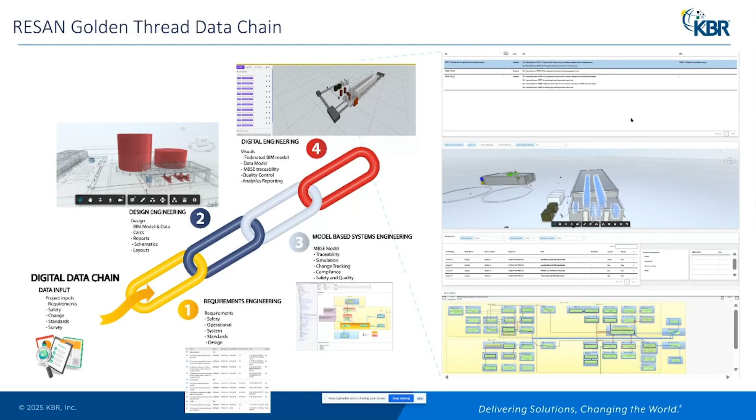So the use cases for such a tool. We've got a number of different use cases here. The most obvious one is requirements impact analysis. So if somebody wants to change a requirement, we can show all the things that requirement is traced through to. And then we can look from the bottom up as well. If somebody wants to make a change during construction phase or in through life support, an asset needs to be replaced, well, we can show you everything that's connected to that asset as well.

Safety case support: the tooling is there to show which assets are involved relative to which hazards, what safety requirements are traced to what, and what's involved in mitigating various safety issues. Part of what we need to do in order to make this useful is capture a large amount of information about key design parameters related to each of the assets. And so that naturally lends itself to initializing the effort to capture the technical specifications for each of the assets for procurement. It also allows us to seed asset management information systems. And by virtue of the fact that we've got all the information now in one place, we can do other things like requirements dashboarding and various traceability views.

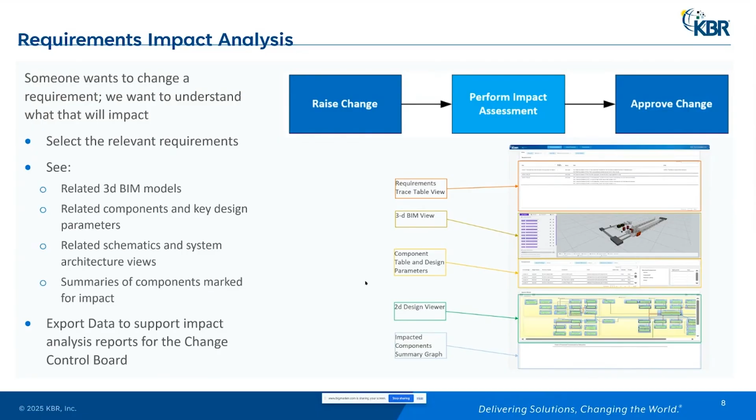And then finally, we've also got a little summary graph, and we can set that up to do what we want with it. So design change is very much the same, except we're now essentially using it in reverse. So we'd start by picking out a particular component.

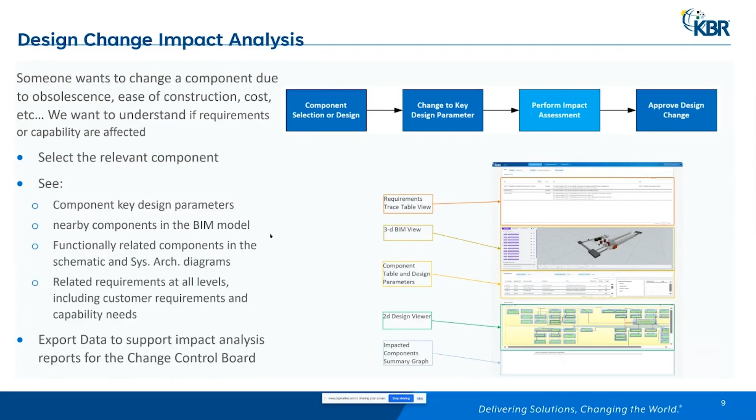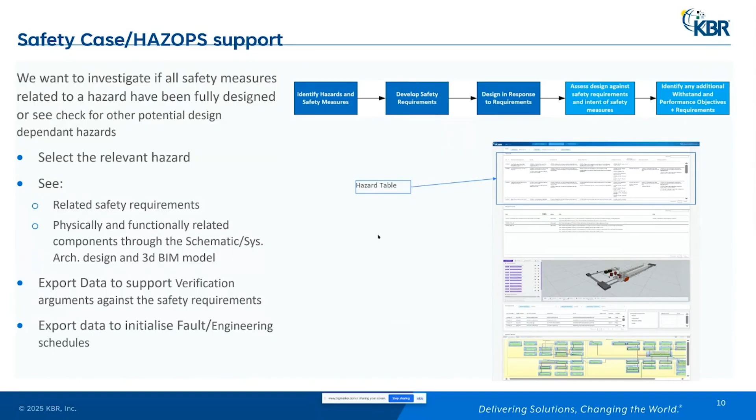Investigating how it fits into various functional chains through the system, and then we can explore the traceability from each of these elements back up to requirements and hazards and so on. You might be able to see that we've got a couple of little tabs up the top there. So we've got a different tab for each different sort of major use case. So we can move onto another tab, and then up the top, we've now got a hazard log view, which again is traceable, clickable, all of those things as well.

Okay, so having talked about some of those use cases, how have we actually put it together, and how does Capella fit into the picture? Capella is absolutely central to making this work, because what we have is all of the requirements information, all of the safety information, tracing through to the system model. So that's an important step. And then each of the different components in the system model trace out to the various elements that the designers have designed in their design/BIM tooling, and they've also captured all of the relevant key design parameter information as well.

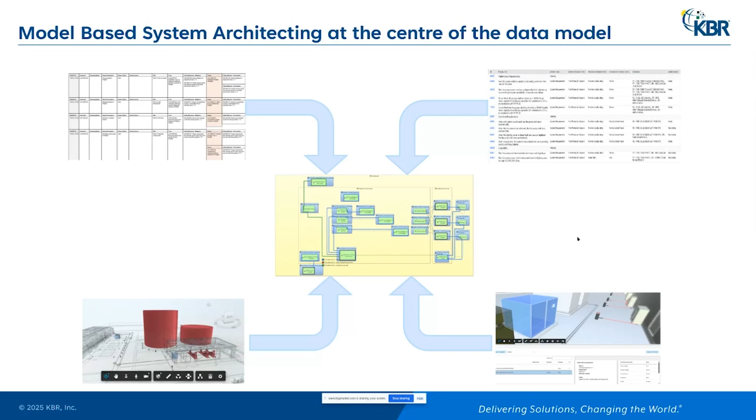The first choice I think we made here was to use Capella. So why did we use Capella, and why is it the right choice for this sort of application? I certainly have experience in using other tools like GENESYS in the past, but Capella is the right tool for this job, for a couple of different reasons. One, the functional chain modeling paradigm is absolutely critical to helping us understand how the various elements of the system all work together to satisfy a requirement. And that then helps us manage the traceability between the system model and the requirements model.

Next, there's a lot of data moving around behind the curtains to make all of this work, and the ability to use Python for Capella, which is such a powerful tool to help us with complex import and export and manipulation operations, is absolutely critical. It helps us make the tooling do what we need it to do. A number of other tools out there just simply don't have that.

The next is the REC and RPL paradigm. This is going to be very useful for us as we work through reference models and can start following the patterns that we've learned in pulling together the system model the first time, and then start replicating that again and again. Infrastructure models tend to have architectures that are quite repetitive because we're building the same thing again and again for each different building, for each different room, or along a train line, things get repeated. So REC and RPL, very, very useful.

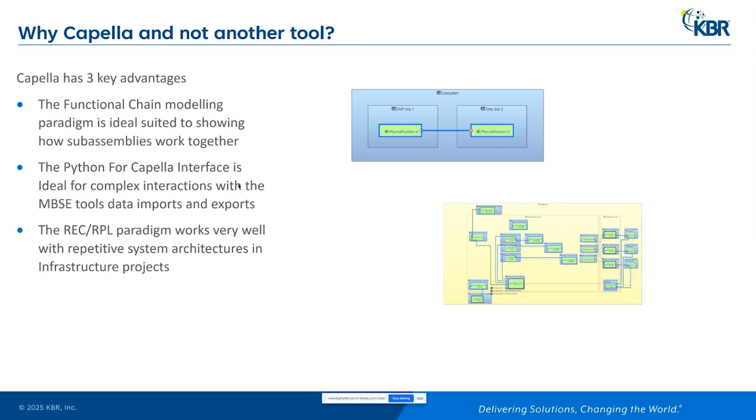So let's have a closer look at how we actually use Capella in RESAN. What I've got here is very simplified, and might be missing a few bits, but for the purposes of this presentation, I think this is good enough. What we have here is a simplified HVAC system, and we could have used any other basic infrastructure-like subsystem. We could have used CCTV, passenger information, electrical distribution. In fact, we have a little bit here. Because the pattern is more or less the same. There's an endpoint somewhere, a connection from that endpoint back to a local central element, and then a connection from that element somewhere outside the scope of the project.

So what we can see here is we've got three functional chains: one to supply cool air to a room, in the red we've got ventilate stale air from a space, and in the green, distribute power to the HVAC system itself. As we look at the functional chains, we've got air coming from the outside environment going to the cooling subassembly, which then goes to the air supply subassembly, which contains all of the assets you need: an air handling unit, ducting, and the air vent or air terminal, to supply air to the room. And then from the room, we've got the ventilation subassembly, venting air back out to the environment.

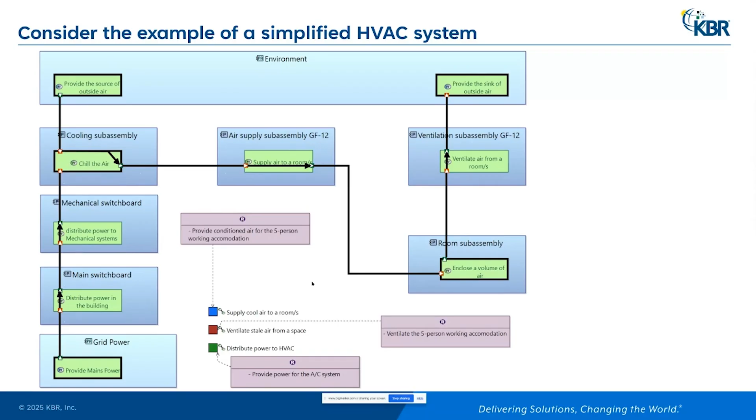So each of the subsystem level requirements, they trace to the functional chains, and further to that, we can also pick the top level requirements, and that then traces naturally to the compound functional chain, which includes each of these different subsystem level functional chains to show how the system as a whole, the infrastructure system as a whole, works together to achieve the top level requirement here of providing livable working accommodation for the entire system. So we can see we've got low level requirements, high level requirements, low level implementation, and high level implementation.

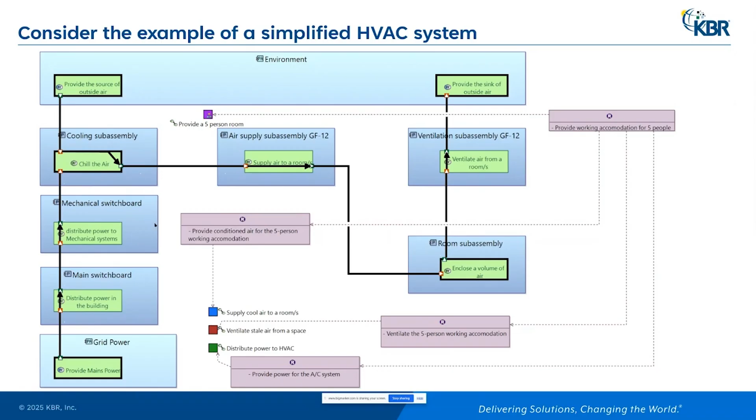This sort of shows how everything ties together. So we've got requirements coming in, and also safety data as well, and that traces through to the functional chains. And the functional chains, through the allocation of the functions, show us the relationship to the subassemblies, and then the subassemblies are the parents of the assets. So what that means, if we have a look here at the basic breakdown structure that we use, we've got the subsystem at the top level, followed by subassembly, followed by asset. And what that translates to is something a little bit like this.

So underneath the HVAC system, we have a number of subassemblies here. So here, the ventilation subassembly, which includes the air terminal, the ventilation duct, and the fan. And we've got the air supply subassembly here, which includes the air conditioning or cooling to air handling unit duct. We've got the air handling unit, we've got the air handling to the room duct, and then we've got the air terminal at the end there.

If there's any HVAC engineers on the line, I do apologise if I have designed something that is fundamentally wrong, but it's pretty useful as a little example.

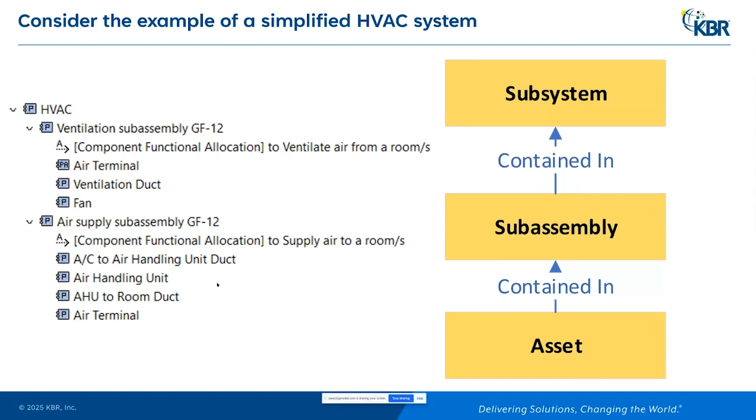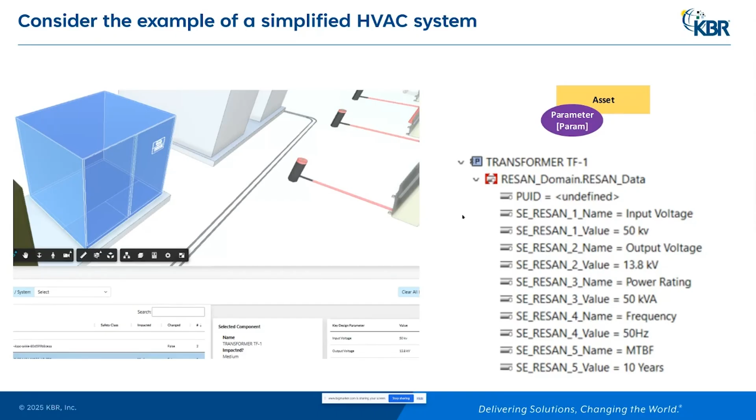So then, in addition to that, what we can capture in the model by using the property values management tool and defining a property set and all of the properties, we can start to capture those key design parameters related to each of the individual assets. So we can see here we've got input voltage, output voltage, power rating, and you can see that the way that we've done it is we've used generic names for the property value variables, and that means that we can capture different key design parameters for each of the different assets. That's quite important.

All right. So obviously there's a bunch of information there that we need the designers to capture for us. And so what they do, and they're used to doing this already, so that's kind of handy, is capturing metadata in their models. Every designer in infrastructure needs to capture metadata in their models for one reason or another. So all we did was say, can you capture a little bit more for us, please? Can you capture the key design values that you've calculated? You should already have that because you've done the design. Just please capture it in the model as well.

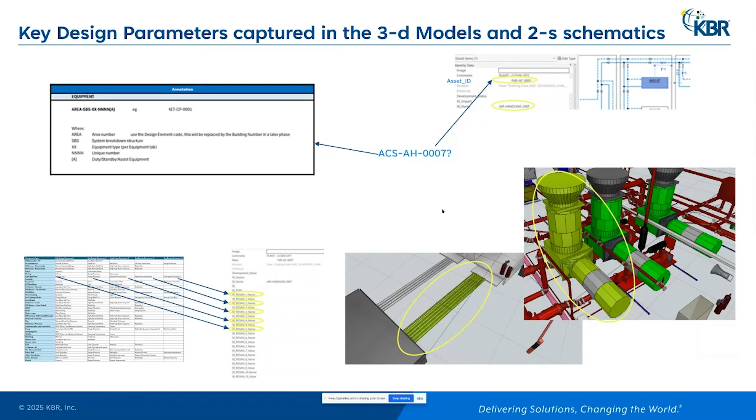So they're able to do that against each of the 3D elements, and they can also do that in the 2D schematics as well, which is great because it then helps us tie in the 2D schematics as well as the 3D modeling into the tool.

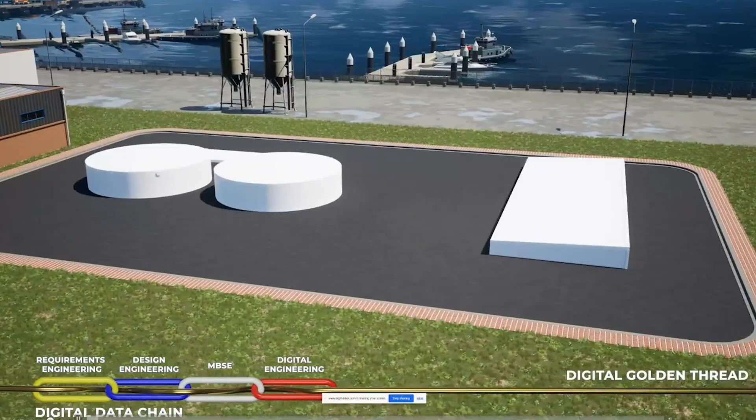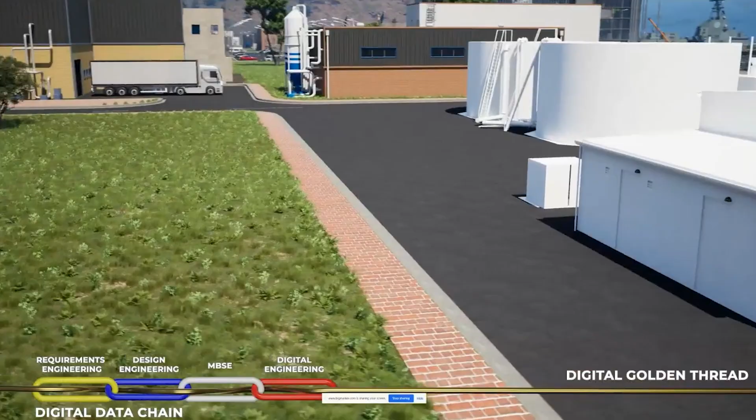So next, I have just a little bit of a video which I'll talk through, which introduces the example that we use. So here we've got a very much generic pump house with a substation next to it. So this is just a very small example. And we can see we've got a couple of transformers outside the substation there. We can see we've got some air conditioning units. We can also see some fans and some lights and some emergency lighting, and the brown elements are high voltage equipment cabinets as well. You can even see a little fire extinguisher there.

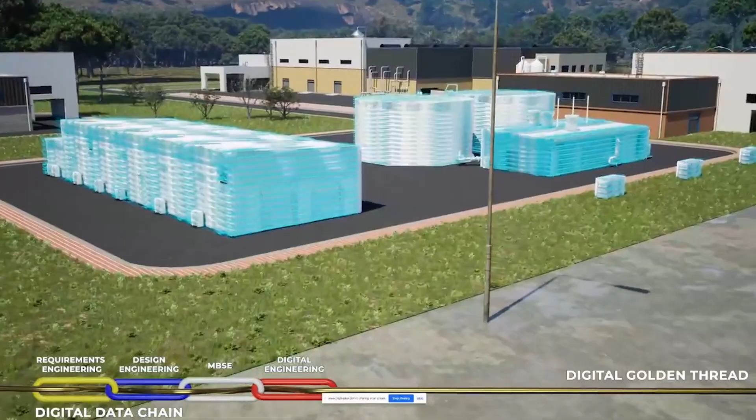So that's the little example that we use when we're showing off what RESAN can do without exposing our customers' information. And we'll see in a moment just a little bit of the interface.

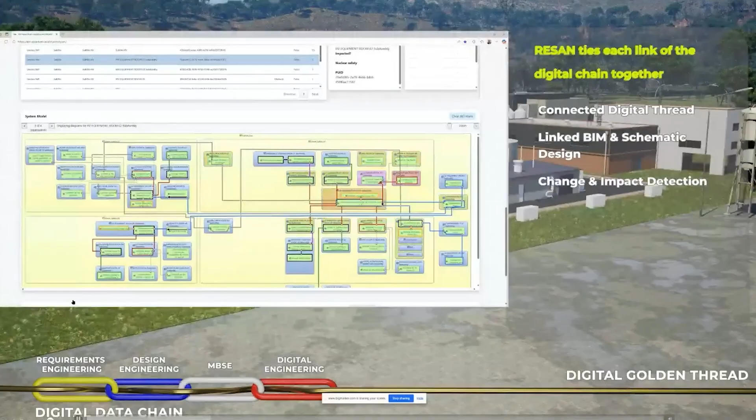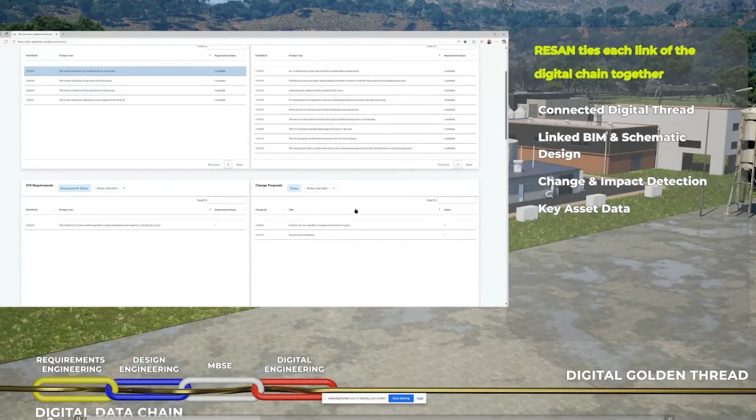So this is what it looks like. We can see the 3D model, we can see the components table, and we can see that we've got Capella models. We also use the property values management and the diagram styler to show additional information like potentially impacted components. Each time we click on a subassembly or an asset, we can bring up the component information.

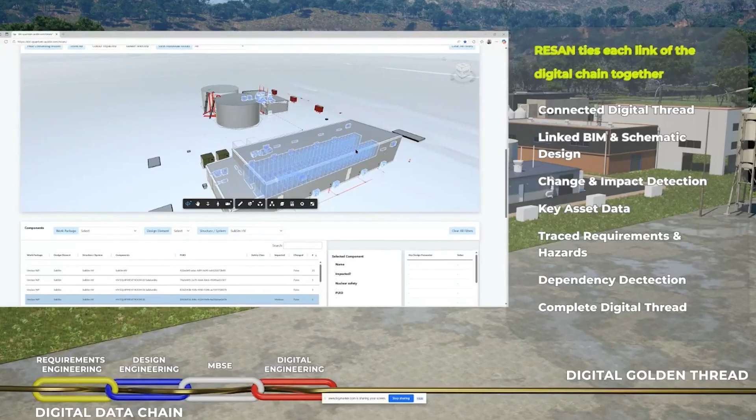And then this is our slightly snazzier requirements view of the world. We can click on a requirement, and we can see that everything else filters relative to that requirement. As we scroll down, we can see we've got a different set of things selected in the 3D model, all related to that top level requirement. We've got a different set of components selected as well. So that's just a very quick introduction to the tool.

Now we'll have a slightly longer look at the interface, which I will now drag across. Okay, so hopefully you can see that okay. So this is the same example.

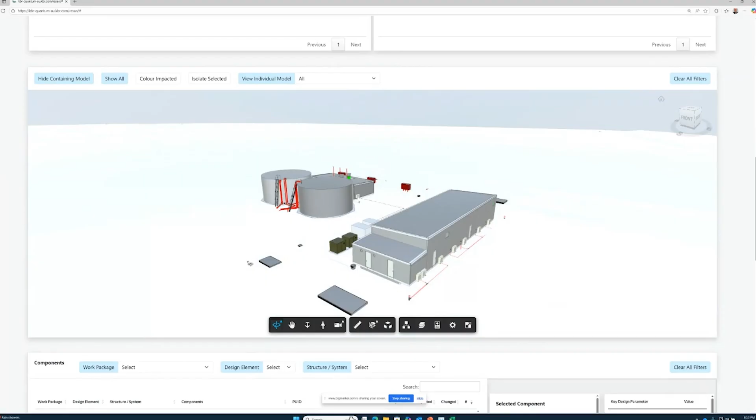You can see the interface here, and we can do all sorts of interesting things that are typical of this sort of tool. We can do sections if we wish - I won't do too much of this - so we get a slightly more cut down view of the world. We can color potentially impacted elements, so we get an instant visual representation of things like that.

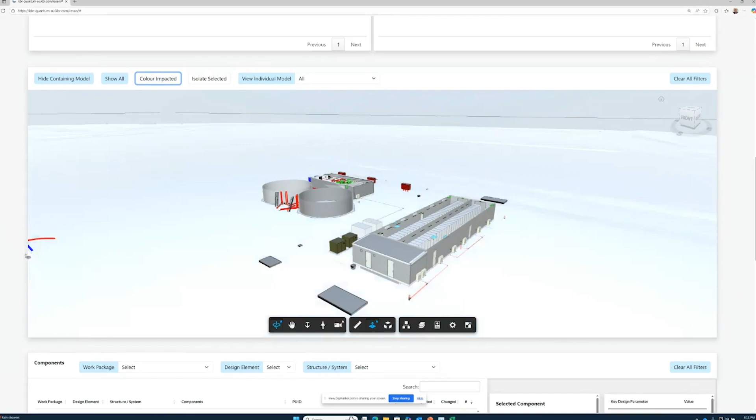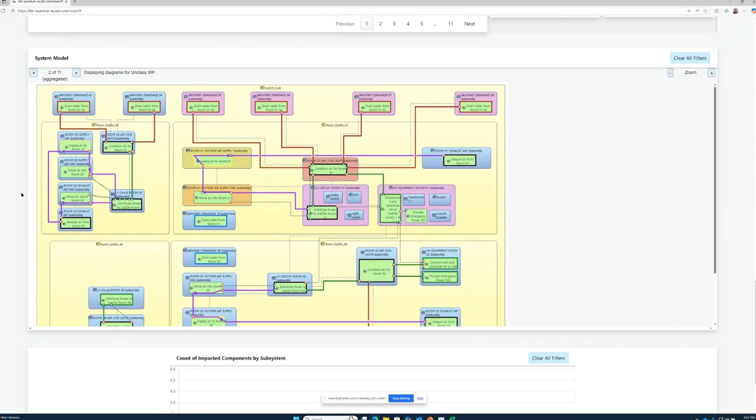And down here we can see we've got a set of different system diagrams. Now in our real project, we also have a set of schematics that exist in the same interface. So I'll just clear the filters here.

So this requirements quad is pretty neat. We've got high level requirements, low level requirements, safety requirements, and then change proposals. What we're able to do is just click on something, and we can see straight away everything else is filtered relative to it.

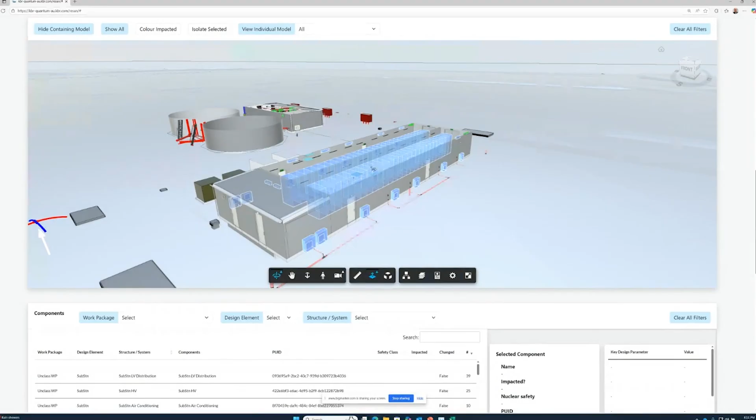So we can see here that we've got all of the high voltage equipment. We've also got the air conditioning identified, and the external units because I've selected the air conditioning units for the substation requirement. We can see just the subsystems, subassemblies and assets that are actually related to that particular requirement, and we can see a smaller set of system models here, 5 instead of 11, and it's all clickable.

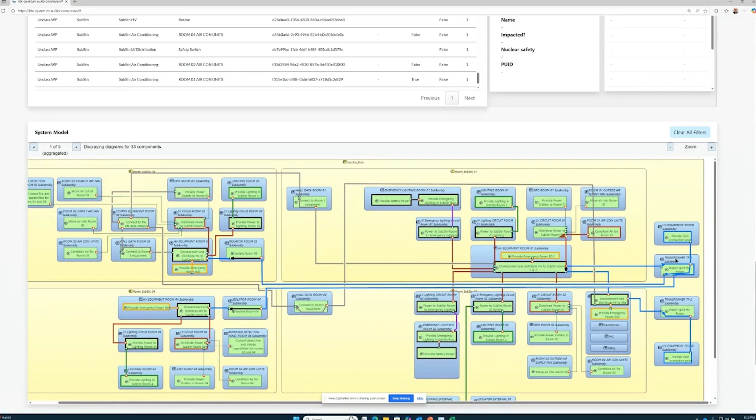And this is something else we've used out of Capella, which is really useful - we've used the XHTML export to be able to generate clickable images that we can then take advantage of. So I can now click on this transformer subassembly, and I've now got again a different set of diagrams.

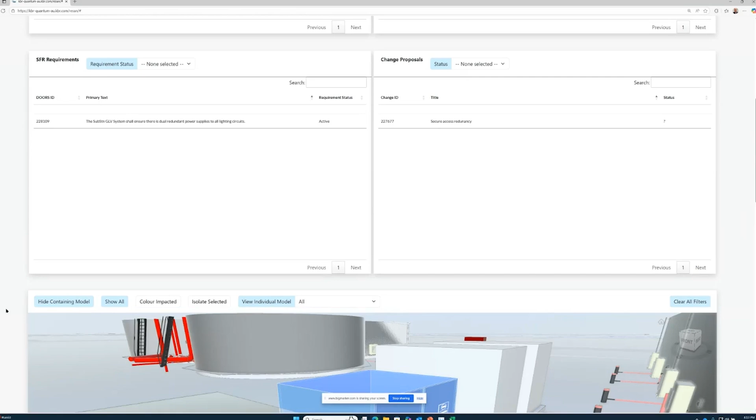And I can select the precise transformer here, and we can see all of its key design parameters here, just like the slide. We can see all of the requirements, so they've changed their filtering again relative to the transformer, and that's all driven through the traceability from the asset up to the subassembly through the functional chain, then into the requirements and on.

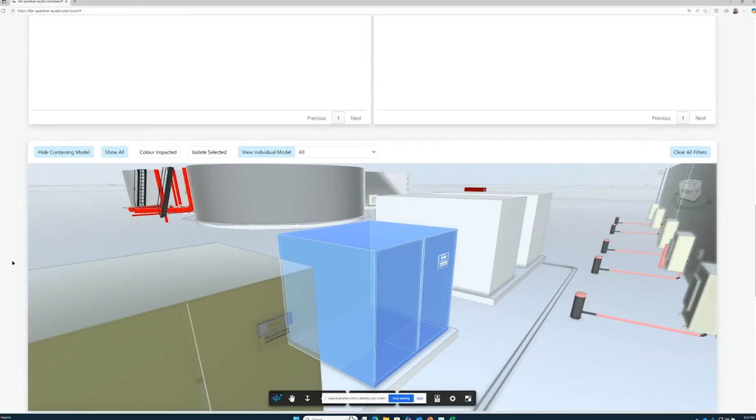And we have a look at the hazard analysis tab. We can also see the relevant entry in the hazard log that is related to that transformer. Okay, so there we go - that's, if you like, a very quick view of what we've been able to achieve.

Hopefully you can see how central Capella is to what we've done, because none of that joining up of the BIM models and the requirements and safety data is possible without the system model in the middle. So if I get that out of the way and come back to the slides, I've got one or two more slides to go - I think this might be the last one.

Lessons, sort of successes and opportunities. Broadly, I saw this in three categories: organizational/planning, technical, and value. So to begin with, organizational and planning.

You might think that when you're trying to introduce something new onto a project that by and large people would be standoffish, and this wasn't the case. I was pleasantly surprised that when you can show designers the power of the tool and what it can do for them, in terms of traceability, they were very keen to help contribute, which was a fantastic experience. Having said that, making sure you've got budgets for them to enter in the metadata and so on, very important.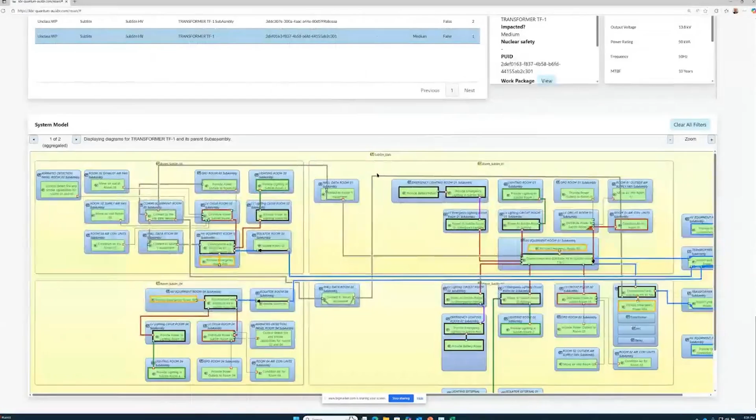That actually reminds me, there was one small thing that I did wish to show off that I missed, so I'm just going to go back to that very quickly. And that is the data export feature.

So in the interface, we've seen how we can show the different viewpoints, but what if you want to see a relationship that is different or perhaps not easy to show off in a web interface? Well, we've also got this little data export feature that allows us to identify each of the objects in our schema.

And identify that we wish to see them traced from one to the next. So we've done that, and that allows us to produce neat little exports. It's effectively a choose your own adventure sort of traceability table. You can pick whatever you want to see, trace to whatever is important to you, whatever golden thread or digital thread is important to you. We can pull that information out as well.

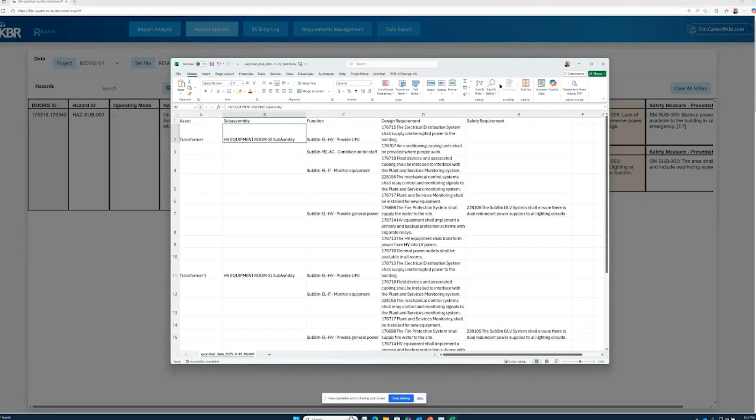So let's get that out of the way. Back to here. And okay, next, value.

It was really interesting to see how the customer reacted to what it is that we were doing, and it really sort of spurred us on to not forget about them, the digital thread and the golden thread. They're wonderful concepts for doing design and making sure that you haven't missed anything, and helpful for proving you built something that's safe.

But then the customer was really excited about the asset management and through-life support possibilities. So that was really great to see.

And then the obvious extension of that is that what we saw was that depending on the role people had, they tended to be interested in different perspectives. Obviously, the systems engineers were more interested in the requirements. The designers were more interested in the 3D models and showing traceability there.

It was a challenge for us introducing this for the first time to show value early, and I think that a focus on showing requirements traceability early probably helps in this regard, because that's what's best developed, whereas the designs might be very approximate, and people know there's going to be an amount of change.

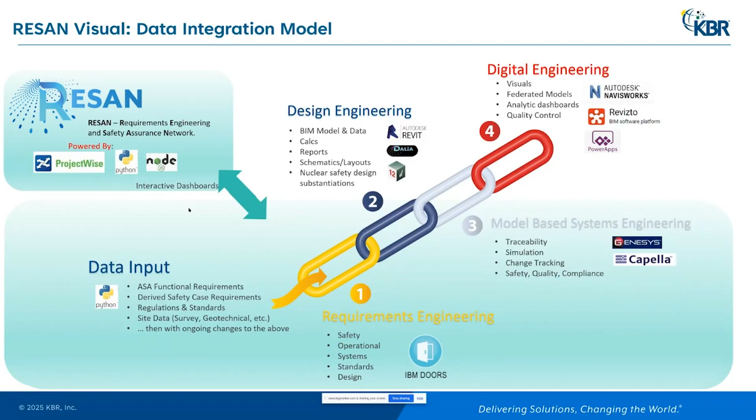So I guess the fundamental core elements are, first of all, we've used Bentley ProjectWise to capture the right versions of the information. Then there's been a bunch of very clever stuff done to melt all of that information down together into one digital pool of data that links everything together. And then we've developed the web application that's able to present all that information back to people. Hopefully that answers the question.

Okay, so another question: if you could add more information in the interface, what would you want there? Like more views or more data? That's almost not a question for me, because what I try to emphasize to people is what we've done is just data. So whatever data you have associated with anything you're working on, we can capture it, melt it down, and present it back in whatever format you might be interested in. It really does depend on the application you might be interested in.

I've had people want to look at, from a through-life support perspective, the possibility of capturing maintenance records, for the sake of argument, traced through to the asset. That's probably one example I've heard people talk about. But from my point of view, it's just data, so we'll capture it.

We've got a range of different widgets from a range of different perspectives - widgets meaning different boxes in the interface showing a viewpoint. So whatever you've got, I don't really mind. I'm just keen to vacuum up as much data as possible and show as many connections as possible.

Thank you for the presentation. Are you able to share any information on the qualification of RESAN, meaning if you followed any particular standards when developing the tool? Well, certainly this is a KBR-developed tool, and KBR has well-developed standards about how we develop tools to make sure they are, for example, properly cyber secure. A lot of effort's gone into that sort of thing.